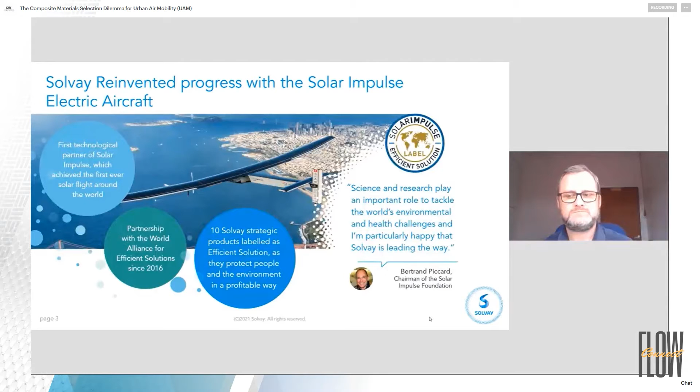Now, as we look at a little more about who Solvay is, we've been a participant in the aerospace industry for half a century. So we have the broadest portfolio and are a leader in the materials and process development in the industry of composites. We have materials of every different sort, every different size and shape. And our goal is not just to be a material supplier, but to understand our materials sufficiently well that we can bring to our customers a combination, not just of materials, but of the processes, of the expertise on how to use them, and design expertise that enable our customers to use them in the most efficient way possible. And so that focus on what we call application engineering is really what we believe sets Solvay apart from the rest of the industry.

And then lastly, how do we really deploy that, not just on a small scale, but how do we deploy those technologies that apply to mass industrialization? So as we look at where this particular market leads us, with the volume, the number of parts that need to be manufactured, I think this industrialization effort actually becomes particularly relevant. Go ahead. Next slide, Rob.

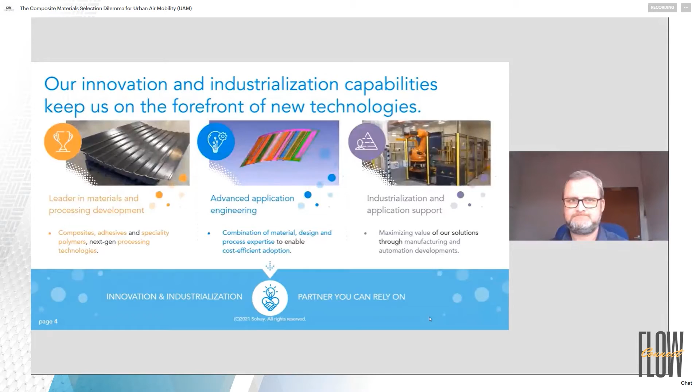As I mentioned in the previous discussion, we've been supplying materials into the aerospace industry for half a century, for nearly 50 years. And so we have a strong legacy of materials for defense, for space, for commercial aerospace. It crosses the spectrum of all types of materials that need to be used in these applications. In addition to that, we actually have an equally strong portfolio of materials that apply to the automotive world. We have been supplying materials into motorsports, into cars, and now the latest generation of e-vehicles, e-mobility, with a portfolio of products that we believe spans most of this industry, frankly. And we've been doing that for 40 or 50 years.

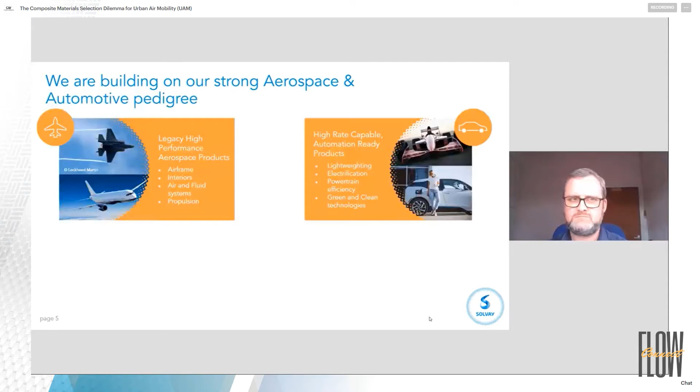So what do these two things have in common? Well, the very interesting thing is that as we look now to the future of urban air mobility, or this advanced air mobility market, we see that these two industries, aerospace and automotive, and our expertise in each of these uniquely positions Solvay to be a supplier into this urban air mobility market. So instead of making a handful of aircraft a month, we're talking about making hundreds or thousands of aircraft a month. And so the ability for us to lean on our high rate capable materials and our automation ready products, and also the processes that we've developed to go along with those, in conjunction with our legacy materials, positions Solvay to be uniquely qualified to supply this market.

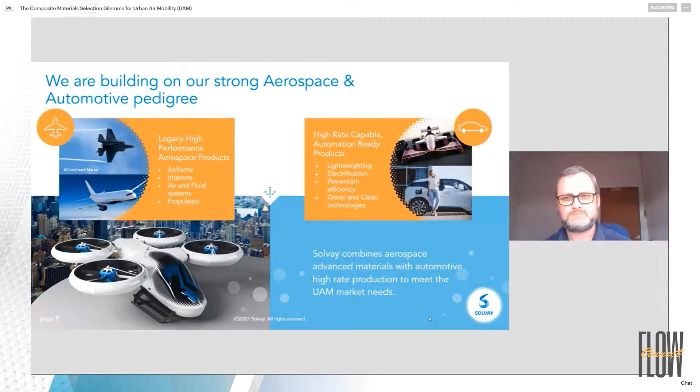So again, our product portfolio spans beyond just the products that we're going to talk about today. We just wanted to make that clear.

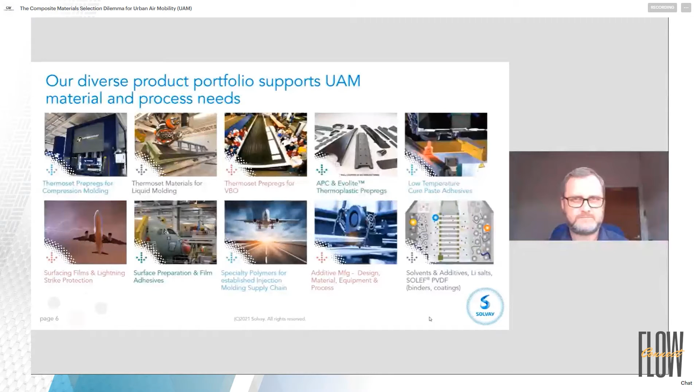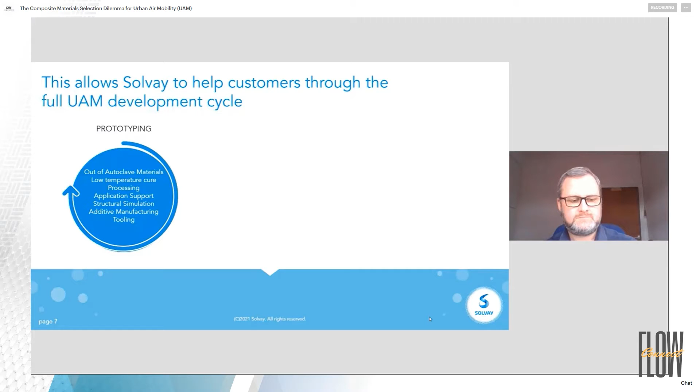So how does all this work together to benefit the urban air mobility development cycle? Well, first of all, we understand that there are specific materials, processes, and needs that are required during the prototyping phase. This becomes particularly relevant in the choice of materials that you use, because ideally you can use materials in the prototyping phase and in the second phase, which would be your low rate manufacturing and certification, that actually are complementary or the same. That'd be an ideal circumstance. And the reason why that's ideal is because it helps to shorten the timeline that would be experienced through this development cycle.

From this low rate and certification phase, the ability to move into full rate manufacturing, and again, ideally using that same product, additionally shortens the development cycle. So this overall development cycle, and not just in time, but in material costs as well. Again, by focusing in on products that you can utilize today that help you achieve all three areas of manufacturing with a single product form brings great benefit to the industry.

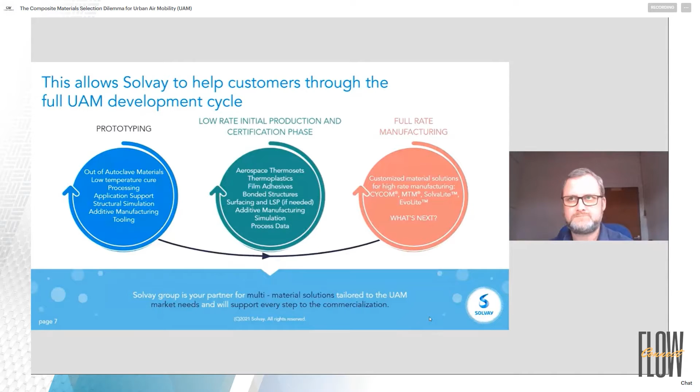And so this is why we felt like MTM 45-1 was uniquely qualified as a product that can be useful in the urban air mobility space. Our focus is to make sure that we can support our customers through every single phase of this process: prototyping, initial production and certification, and also full rate manufacturing. From here, I'll turn the time over to Rob to specifically talk about MTM 45-1.

Thanks, Glade. That's great. Thanks for the overview and setting the scene really well. So I'll now spend a few minutes and walk you through a few slides that we've got focused on MTM 45-1 as a product, its attributes, why we think it's a good fit, and why we think it can really help advance the use of composites in this exciting emerging space of advanced air mobility.

Now, it is important just to say that MTM 45-1 is just a part of our portfolio, so we do have a very broad portfolio, as Glade touched on, and he'll share a bit more of that towards the end of the presentation as well. But it's a system that we have in our product offering today that we think fits very well and will help in the early stages of this market evolution and development, while we also work on the future states and future technologies that we think will be needed when we think about the industrialization and rate challenges that are to come.

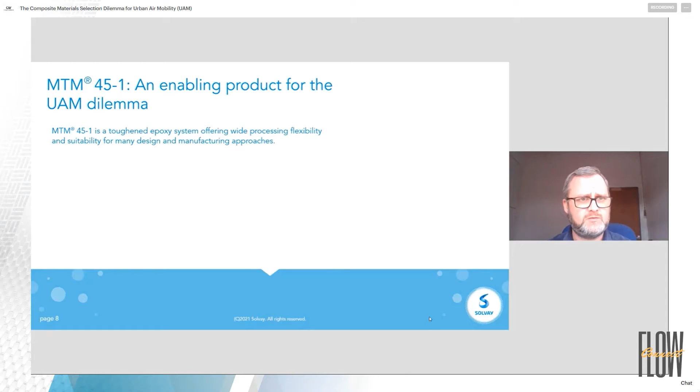So MTM 45-1 is a toughened epoxy system. It does offer a wide processing window, and with that, suitability for many different design and manufacturing approaches, which is really one of the strong reasons that we are positioning it as a key product for this space.

Now, it has several key features that we did want to highlight today. One is it does carry with it aerospace pedigree. That comes from its use in both primary and secondary type structures. It has vacuum bag only, so out of autoclave capability, as well as traditional autoclave fabrication capability. And it comes with product forms - an experience that is very applicable to standard hand layup, but also product forms that are very suited to automated fabrication techniques as well.

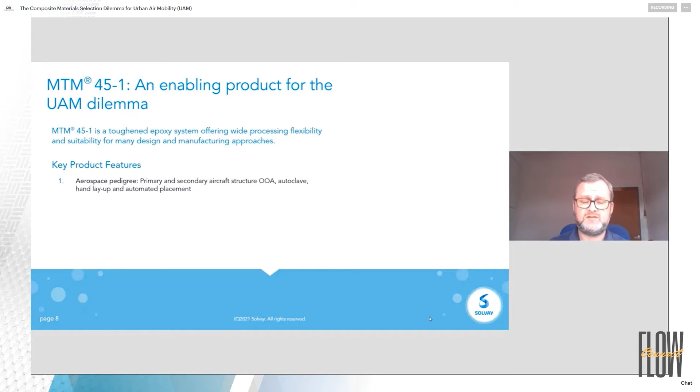So as you've heard me mention, it does have really good process flexibility, certainly from an aerospace pedigree perspective. So what this means is, beyond this out of autoclave capability, it also has very good cure flexibility in terms of the capability with the system.

It does cure down at 80 degrees Celsius, which for early stage prototyping, when maybe there's a higher frequency of change to design, with that a higher frequency to modify the tooling, this can have some really good benefits in terms of lowering the cost of the tooling, lowering the cost of change, and really enabling our customers to work in a rapid and agile manner with this system in those early stages when there's a lot of optimization and exploration work going on.

Now, having said that, it also has high temperature cure capability. So as with a lot of traditional aerospace systems, it does cure up at 180 Celsius to get its full performance. And this really delivers a very capable level of wet glass transition temperature performance up at 160 degrees Celsius. So really, very high capability from that perspective, and is a homogeneously toughened system, which drives a good level of aerospace performance from that standpoint as well.

In terms of the data and the data availability that we have, we do have extensive data available on this particular product and the portfolio that goes with it. And what's very critical is that data is both accredited and verified through the NCAMP Institute and process. So really, another strong attribute of this system, allowing our customers to not just work very effectively with its capability, but also to take it to market as quickly as possible through the design and qualification approach that's needed.

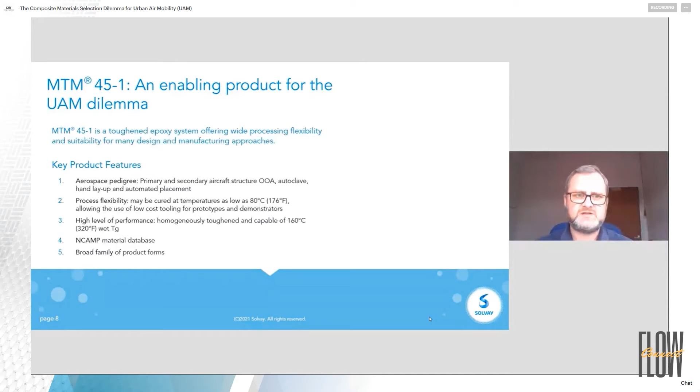So overall, a system that really helps lower qualification costs and time because of the databases and the product forms with that data that we have. A very reliable and robust level of performance, as you'd expect from a legacy aerospace system, but coupled with this process flexibility that really allows our customers to work in a very effective and efficient manner.

Again, certainly as they're looking at early stage development, but having that system then carry all the way through to initial low rate production and full rate production. So allowing the material to have a common thread as you go through the different phases of development.

And for that, we do think it's a system with a very good aerospace pedigree. With that, it brings a really strong database. It has fantastic process flexibility and a product family that really should enable the rapid adoption and time to market for our customers looking to operate in this space.

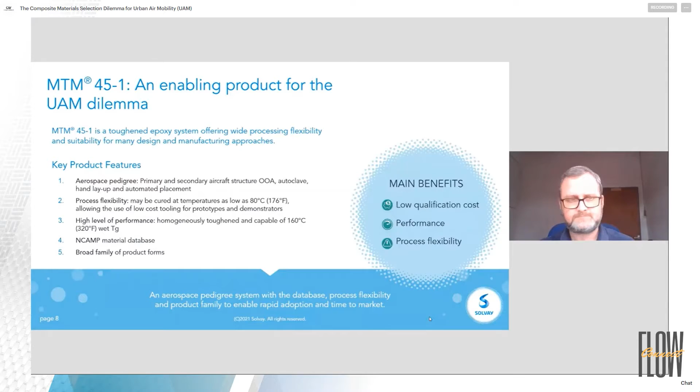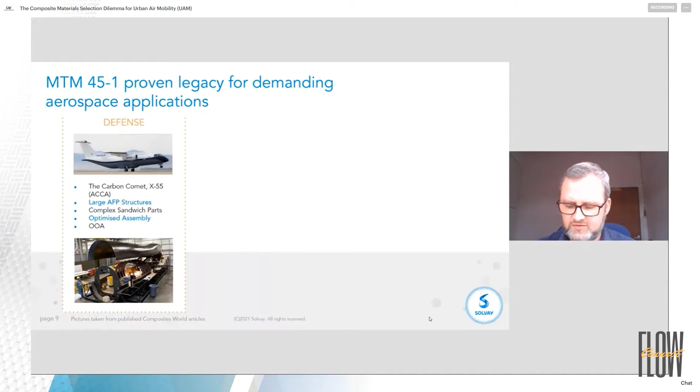So when we talk about its aerospace legacy, it does have proven legacy in demanding applications. I've got some examples here, and I'll talk around the X55 program in more detail on a dedicated slide. But certainly in the defence space, the MTM 45-1 system was used in Lockheed Martin's X55 program, the Advanced Composites Cargo Aircraft Initiative, as part of the Composites Affordability Initiative. The system here was used to take advantage of its out of autoclave capability, used in very large, complex structures, really enabling the customer and the project to take advantage of that with the philosophy they took.

It's also a system that's got some legacy and history in the field of space. It's certainly used by Virgin Galactic with the Unity and Eve airframes. Here, 45-1 was really utilised for the majority of primary structures, again for large, complex components. And here, the real value that was maximised from this is the ability for low temperature cure, allowing for design changes and optimisation early in the process, and helping lower the cost of the development phase for the program while maintaining that high level of performance the system offered.

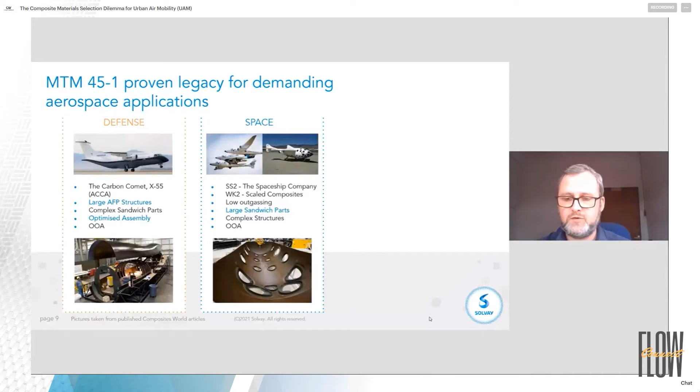And then it is a system that's used in commercial aviation as well, used on programs where it has FAA certification, used in damage tolerant designs, providing that in-service validation of performance, and again used on a variety of approaches with some complex sandwich and monolithic components.

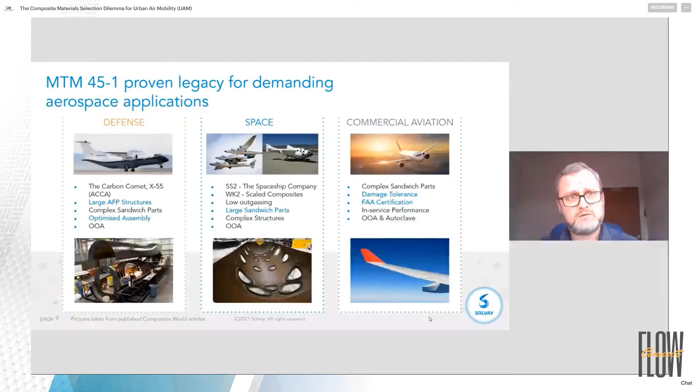So just to focus on the X55 case study in a little bit more detail - part of the reason for this is, one, I think it really helps showcase and demonstrate 45-1 as a system in its own right for a very demanding project and demonstration of the use of composites. I think it's also a really good example of the value of using composites for lightweighting complex airframe architecture, and how those benefits can really be realised in terms of manufacturing, performance, and cost when you look at the total cost of ownership and the holistic view of how the choice of materials and process can impact the overall cost structure and performance from a program perspective.

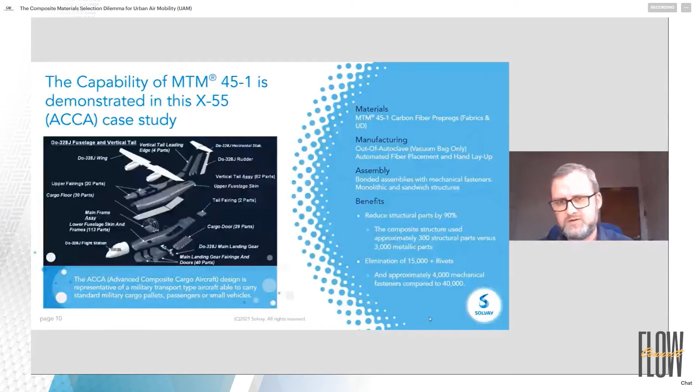So 45-1 was used in this initiative, and this was a research platform. I think the first flight was back in 2009, where a Dornier 328 baseline aircraft was taken and modified for the inclusion of composite materials, really with a view of bringing two aspects to it: one, can composites be demonstrated for both the design and manufacturing of an aircraft at a quicker rate, at a lower cost, and at a higher performance. And with this, the vacuum bag only capability of 45-1 was used, but also with a philosophy of bonded assembly. So a very interesting project for those of you who are not familiar with it - I recommend taking a deeper look at this for the demonstration of what you can achieve with bonded assembly, and really using composites as they're intended to be used, capturing that benefit.

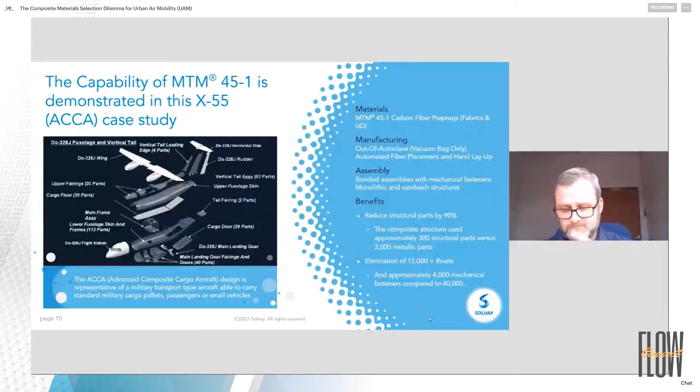Some of that you can see here - when you look at the schematic, the only parts that were retained in metallic were the forward cabin, the wing box, the horizontal stabilizer and the rudder. The rest really took advantage of composites, driving the demonstration that they could reduce the overall part count from initially 3,000 metallic components down to 300 structural parts using a composite design, and with that really eliminating the amount of mechanical fasteners that were used. As you can see here, quite a significant reduction in terms of the mechanical fastener assembly that's more traditionally used. So for us, a great case study for the material, and a great example of what 45-1 and composites can offer.

Now, as I said, 45-1 does have a process flexibility that really does enable a very good level of versatility and scalability from its use case perspective. What this means is, again, with the lower temperature cure capability the system has, and it does process well with vacuum only capability, it does allow our customers to have lower prototyping tooling costs - so when you're in a phase of a high frequency of change. Because we've got that lower temperature, it means you can look at maybe additive manufacturing type tooling approaches where you need to keep at a lower temperature or performance range, but because the material can adapt to those capabilities, it does enable some interesting options from a rapid prototyping perspective.

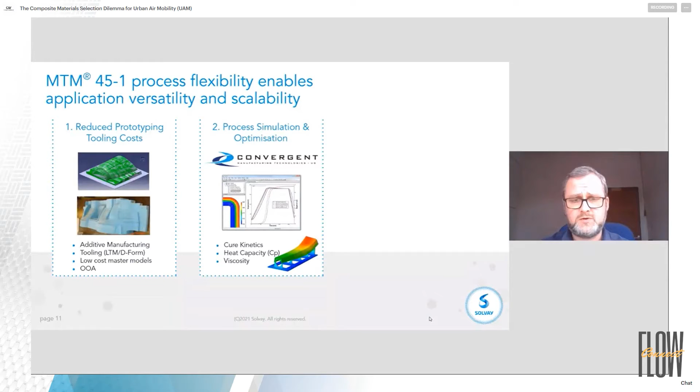It's also, as part of our data set, we have the ability to work very closely with our customers to help simulate the processes and really optimize them based on the kinetics and the behavior of the resin. So we do have full Raven models for the convergent software with MTM 45-1 that really allow us to work closely with our customers as part of the process development and process optimization perspective.

And with that, again, it has this cure flexibility across a variety of different temperatures and times, both with vacuum bag only capability and autoclave capability. So when we look at the needs across the different cycles of program development, all the way from prototyping to certification, low rate initial production and full rate production, this broad capability the system has really allows us to keep the same material throughout the cycle, but work with our customers to optimize the process depending on the needs that the program drives at the time.

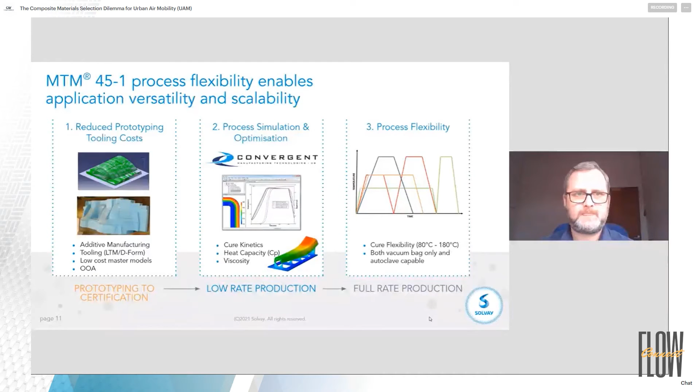Now, as we said, we do have a very strong data set with this product as well, and we're not now going to go into a lot of slides with data. We do have a short summary that I'll share with you next, but just to put your minds at ease, we won't be going through a lot of numbers, but certainly encourage people to reach out to myself or Glade, and we can set up conversations if there's interest to talk through the details of the data that we have. But we do have an extensive data set with this system - a full laminate suite of properties across different environmental conditions, as you'd typically expect with a qualification type database. One of the really unique things we do have, though, is an extended laminate data set with this system as well.

So across typical design properties, not just with quasi-isotropic type layups but also with soft and hard layups, we really give that extra level of detail in terms of how the system performs as you get into some of the design criteria that you may have.

Now with that, of course, we have validation of the fluid sensitivity type properties that you'd expect to see, as well as a series of bearing bypass type properties. So a very good, very strong data set that we've got, and of course that is accredited and validated with the NCAMP Institute as well.

So really an excellent level of data that allows you, as our customers, to work with this system and have an accelerated view of how you can start designing and working with the material, but also have it ready to be validated through the typical qualification and certification requirements that are needed.

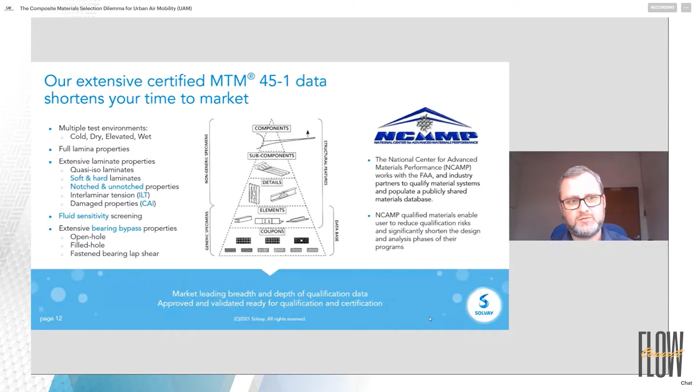Again, the full database we've got is really there to help our customers work with this system in an accelerated fashion. So please do follow up with us after this webinar for questions or inquiries, and we'd be more than happy for our engineering team to work with you on your interest and needs from that perspective.

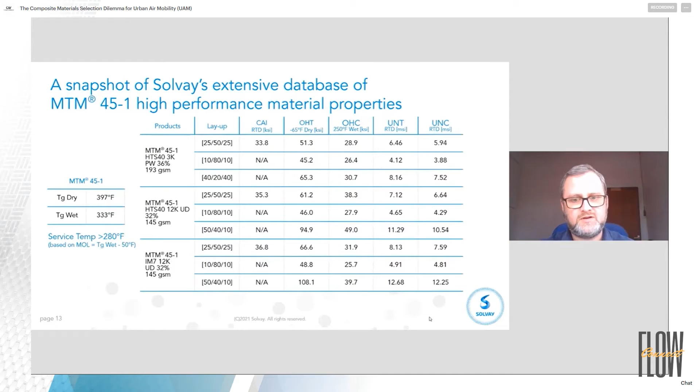So, of course, we've spoken about the capabilities and performance levels a bit. It's more than just the matrix and the fiber, and with that we do have a portfolio of product forms with this particular resin system.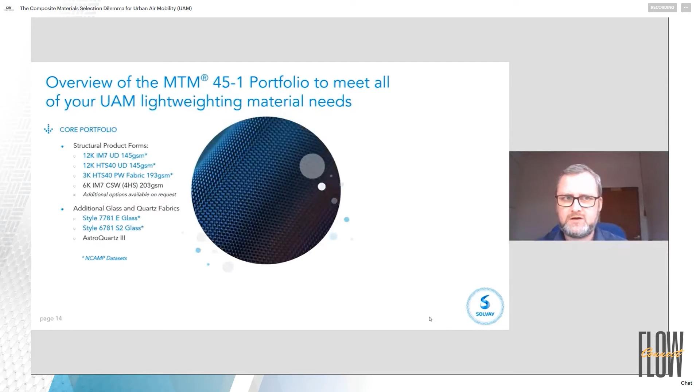Within the core part of the portfolio, and really the foundation of it, we have our structural product forms, the MTM45-1 pre-preg product forms. The ones highlighted here in blue are the ones where we have NCAMP data sets available. We are also working on some new product forms with the resin system — a list we're looking at to make sure we tune the portfolio to the needs of the urban air mobility or advanced air mobility space as that emerges.

As you can see here, we have a variety of unidirectional and woven architectures covering both intermediate modulus fibers and standard modulus fibers — really quite a good complementary perspective in the base portfolio that we believe covers a lot of the needs of our customers in this space. Particularly with the areal weights we've got, it's tuned to help our customers design for thin gauge and weight optimized structures, which we see as being a critical part of this emerging space.

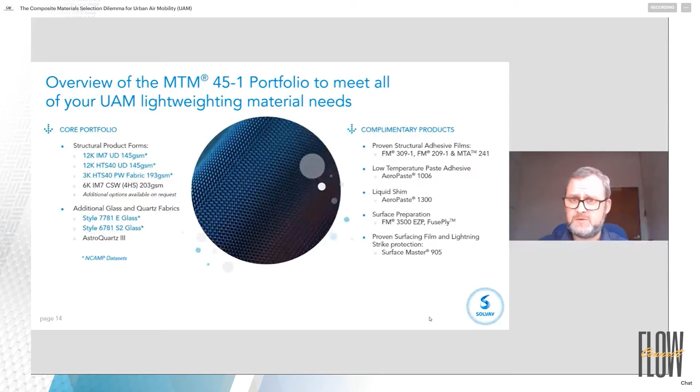We also have some glass fiber product forms, covering both E, S2 and quartz type fibers. And of course we're aware that pre-preg material is only part of it, so we have a full suite of complementary products with our market leading position in adhesives and surfacing capability — a full suite of adhesive films and pastes that work very well with this product form and are fully compatible, as well as surfacing films and lightning strike protection, to provide the full portfolio of product form needs that our customers need to look at advanced and complex airframe structures in this space.

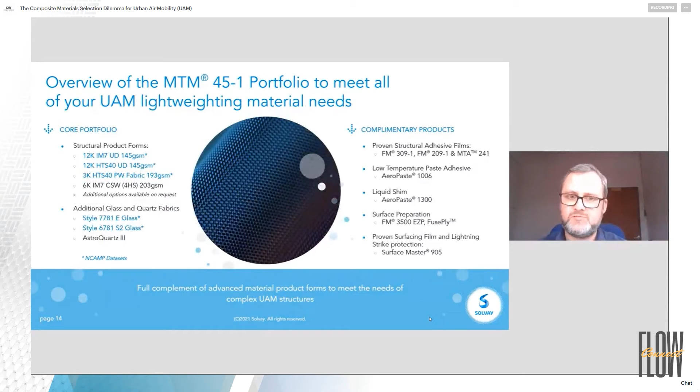So with that, hopefully that's given you an interesting and insightful overview of the product itself, but I will hand back to Glade so that he can talk you through the remaining slides that we've got. Thanks, Rob.

As Rob noted, we do have a broad portfolio, and MTM45-1 though is the focus of this conversation. We did want to spend just a moment to highlight other materials that are also very capable in this space. We won't go into details of these particular systems, but we want to make sure you're aware we have a handful of other products that we specifically believe are very applicable for UAM. And of course, it goes beyond these as well.

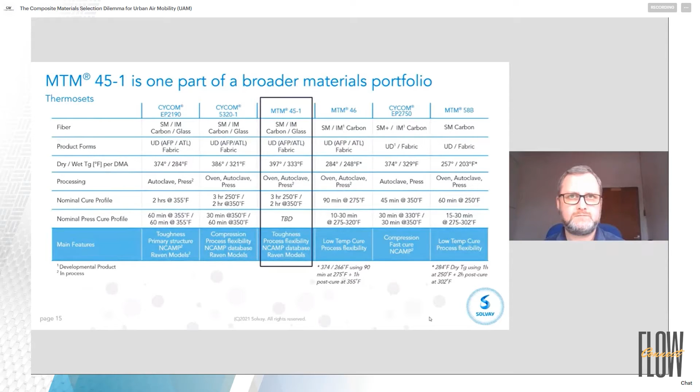The list that you see here is some of our thermoset materials. On the next slide, you will see a list of some of the thermoplastics that we also believe will be relevant. As we look to the future, we see that rate may dictate in some cases that thermoplastics are very interesting as well.

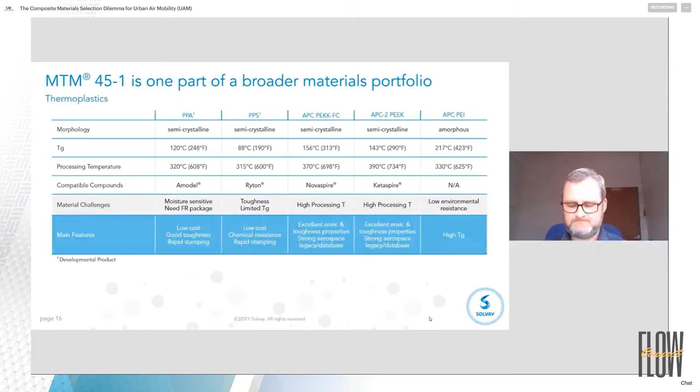As we think about the future and what the future brings for the evolving market needs, we are really keenly focused on being innovative in this space. What does that mean? We will continue to focus on the advancement of thermoplastic materials, to make sure that as people have requirements for thermoplastics, either for performance characteristics or rate requirements, those materials are available.

We have specific projects ongoing right now to address the needs of battery storage with composite materials. These FST systems, fire, smoke, and toxicity capable systems, are particularly designed around the very difficult requirements of flame impingement at very high temperatures, making sure that the occupants of these aircraft are very safe from any potential issues with the batteries.

We are working constantly on introducing new NCAMP data sets. The information Rob mentioned earlier in relation to NCAMP's material data that's available for MTM45-1, we have data sets available also for some of the other materials you saw on the previous list for thermosets, and those will be matured, with other product forms introduced, new resin systems with new NCAMP data sets as well.

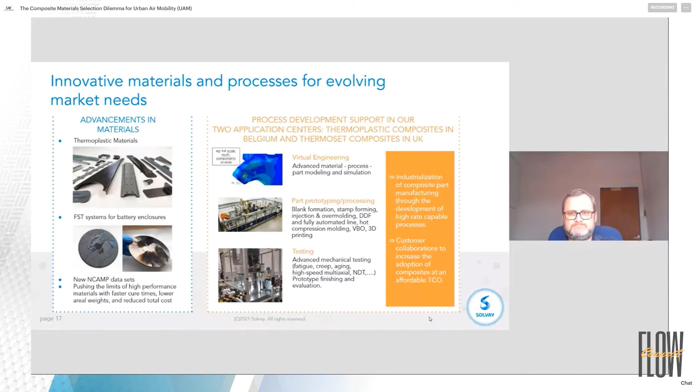Now, to come back and answer the question we started with: there's a dilemma of sorts in the selection of materials. While there are lots of materials available in this space, as we close this conversation we wanted to highlight why we believe MTM 45-1 is uniquely qualified to be something you should take a serious look at.

Solvay is one of the leading aerospace composite material suppliers. We're innovative, looking at new ways of making materials and processes that will help deliver solutions. The ability to use MTM 45-1 to be cost efficient, leveraging all the learnings we have from our automotive experience in the past.

Looking specifically at 45-1, it can be used for everything from prototyping all the way through commercialization, including the variations in manufacturing rates and the ability to prototype with it. This product is actually supply chain ready today. We have all this mechanical data available through NCAMP, and it really can shorten your development time.

Lastly, our focus is really on being a collaborative partner with the industry. How do we best bring our material, not just hand it off to you and say good luck, but actually work with you to bring our expertise and knowledge about this process and the materials to bear in order to shorten your development cycle.